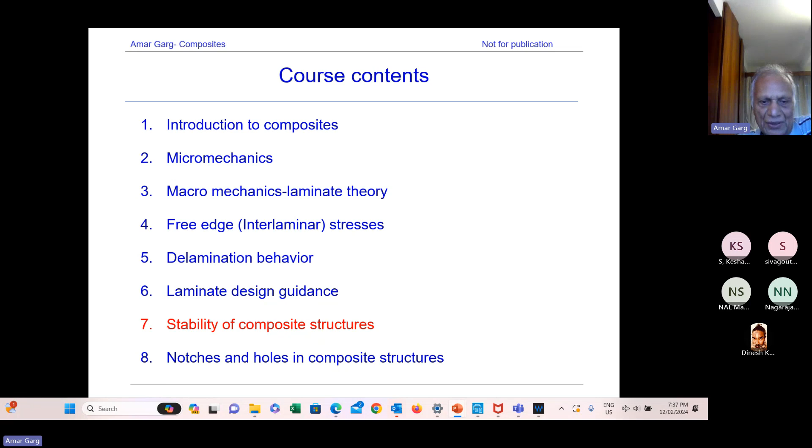Only the red-lettered topics I have not covered. So I covered introduction, micromechanics, macromechanics, free edge stresses, delamination behavior, laminate design guidance, and stability. As I said, I haven't covered notches and holes, even though I was thinking I had prepared the notes - but later on, if there is interest, I might, depending upon my condition also. Bolted joints, adhesive bonded joints, history of aircraft failures and design criteria, damage tolerance diagram, damage tolerance analysis and design of structures, fatigue of composite structures, and testing and evaluation as a separate topic I haven't covered.

But quite a bit of the testing and evaluation part I have included in the certification document.

I thought it might be unnecessarily redundant to cover testing and evaluation separately, since those notes contain a large amount of commonality with certification. So these were the topics I had intended to do, and except for stability criteria, which I haven't covered separately, but let's see, I can provide my lecture notes on stability if I don't cover it. Anyway, it depends on the interest.

Let me go to today's topic. We'll be starting with certification philosophy of composite structures. Most of the presentation is based on the 787 program with which I was associated within Boeing. Many of the slides presented are from the 787 program, which is in a public document, public domain.

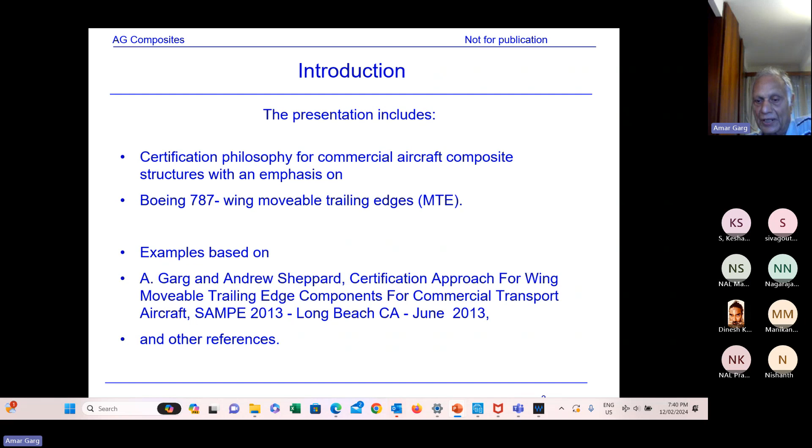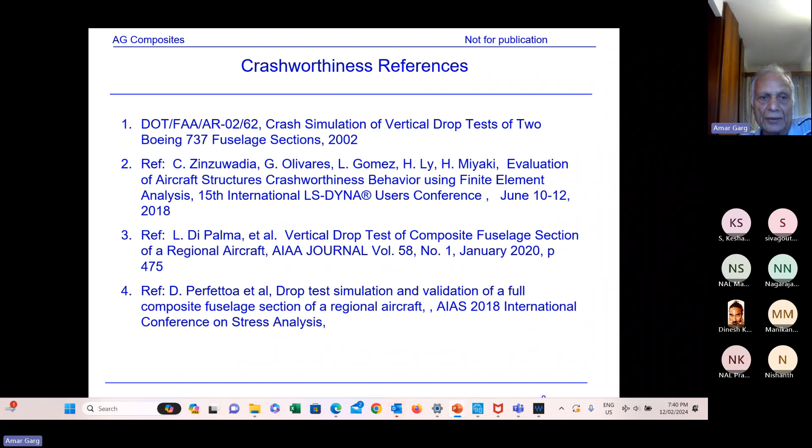I've listed various references in this presentation. It may not be all the references I might have used, but the majority of references I've used for presentations are included, along with some regulation references.

Significant amount of material included in this presentation might be repetitive, which I have covered earlier in my lectures, so please bear with me. If you find repetition, I would not elaborate on those repetitive slides, but I would briefly touch them. It's just to refresh the knowledge and also to maintain continuity of this lecture.

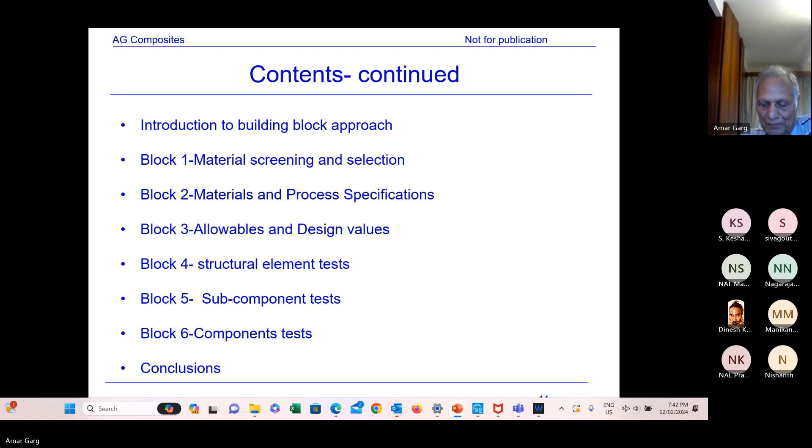Now what is certification? Certification has to be done for any product you design, whether it's furniture, according to certain standards - automobile, aircraft, anything, medicines - everything has to be certified by certain regulatory agencies if you want to sell the product. Same thing happens with aircraft.

Certification of an aircraft is a conformation to its approved design - the design which you or the company designed is approved according to the specifications provided by the manufacturer. It's confirmation of manufacturing processes and is in a condition for safe operation. When designing and selling the aircraft, you have to get certification regarding the design, manufacturing processes, and the operation. We'll see the details of this in the following slides.

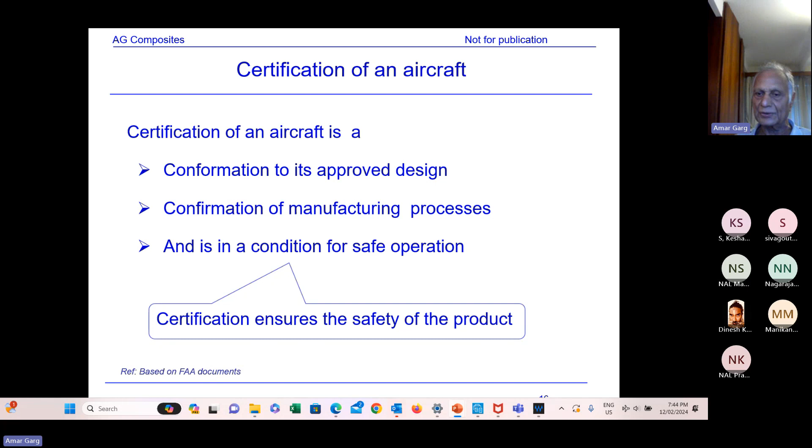That means certification ensures the safety of the product. The basic objective of a regulatory agency is to ensure the safety of the product so that it does not affect the safety of passengers and other property. Certification has three major elements: one is the design, another is the production, and the third is the airworthiness. Approvals for all three have to be given before the manufacturer can deliver the aircraft to the customer.

So what does design approval mean? Design is approved, and when the design is approved, the regulatory agency issues a type certificate. What does type certificate mean? The approval is given for a particular type of aircraft, and the company has to adhere to all the specifications designed for that type. You cannot make even a minor modification without getting another approval from the certification agency. We'll discuss the details of this in the next slide.

Production approval: production is in accordance with the approved design and quality system, and then the regulatory agency issues a production certificate, a product manufacturing approval. When the production certificate is issued, the regulator or their representatives will visit the factory, the manufacturing organization, look into all the facilities, approve the facility, and those facilities have to be maintained according to the regulatory agency. Then there is an airworthiness approval, meaning it conforms to approved design and is safe to operate.

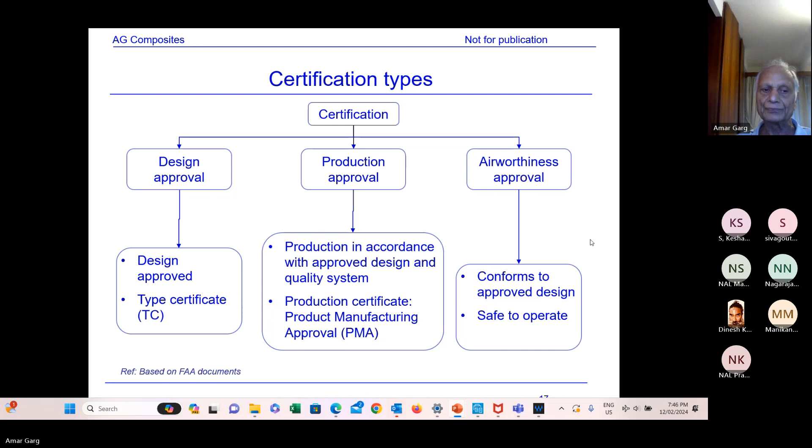Okay, what is this type certificate? Let me elaborate on this important terminology. A TC is issued by the regulatory agency to reflect that the type design is in compliance with the airworthiness requirement - the particular type design, the specifications, and all the design details are in compliance wherever required, covering the airworthiness of the approved design type or type of an aircraft to be manufactured.

You cannot change any specifications, any design detail, any manufacturing process once it has been approved. Once a TC is issued, the design cannot be changed unless at least part of the process for certification is repeated to cover the change.

So suppose Boeing 787, a model was produced, say -8, -9 or -10. Each one was certified when changes occurred. But suppose a particular model was designed with a titanium fitting material, which is expensive, and further research or design changes show that you can use aluminum instead. If you want to change the titanium to an aluminum fitting, you have to get approval from regulations again. If there are major changes, you might have to test a part of the component in order to show validity.

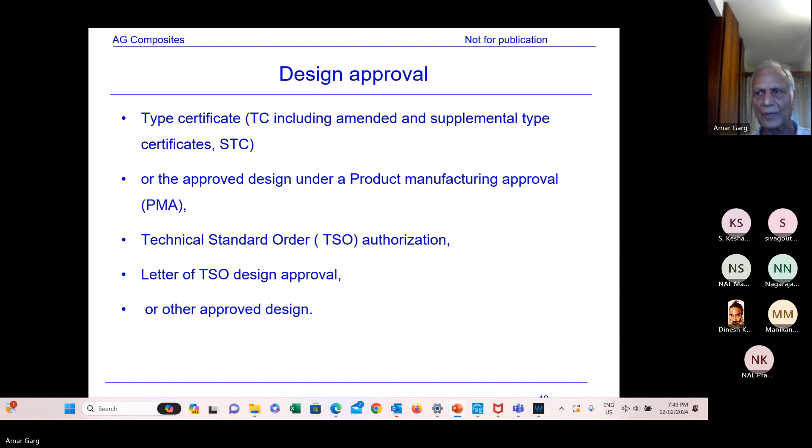Type certificate includes amended and supplemental type certificates. A supplemental type certificate is issued when there are some changes, and the regulatory agency may issue a supplemental type certificate or approved design under product manufacturing approval - that is a design approval given as a technical standard order authorization, letter of TSO design approval, or other approval. These are documents given to approve the design by the regulatory agency.

Production approval is a document issued by the FAA that allows the production of a product or article in accordance with the approved design and approved quality system, and can take the form of a production certificate, a product manufacturing approval, or a technical standard order authorization.

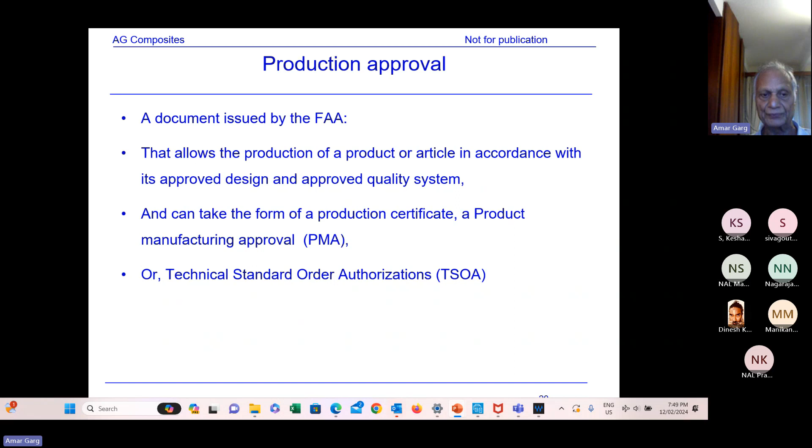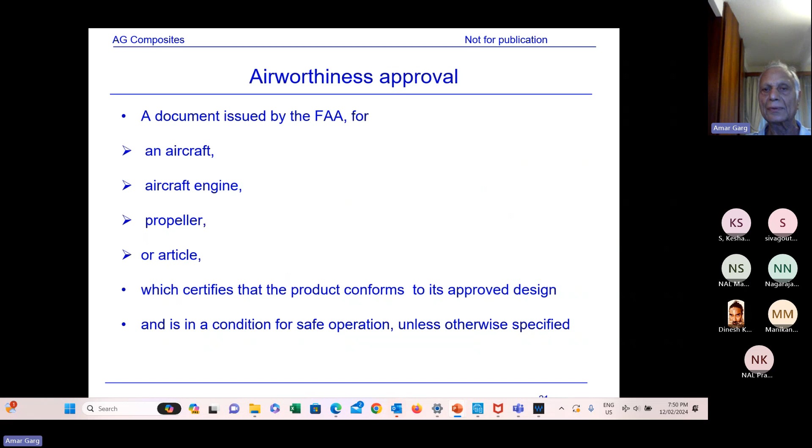Airworthiness approval is a document issued by the FAA for an aircraft, engine, propeller, or article, which certifies that the product conforms to its approved design and is in a condition of safe operation, unless otherwise specified. Once the airworthiness approval is issued, the customer or airline is able to operate it. So these are the three major elements for certification.

Type inspection authorization, TIA, is another terminology you will see in my next diagram. A TIA is issued which authorizes the official conformity, airworthiness inspections, and flight tests necessary. Once the design has been approved, the regulator issues a type inspection authorization to the manufacturer, which authorizes them to start flight testing. You cannot do flight testing until you receive a type inspection authorization.

Okay, what does it mean? It fulfills certain requirements - type certificate, supplemental type certificate, amended TC, and amended STC. This is the objective for issuing TIA.

Now here is a flow diagram which I have taken from the Composites book by M. C. Niu, with a few changes I have made appropriately. This shows the complete certification process for the aircraft: the manufacturer submits an application for type certificate, an airplane specification report, and a certification plan to the regulator, and after receiving and studying that information, the regulator assigns the project number.

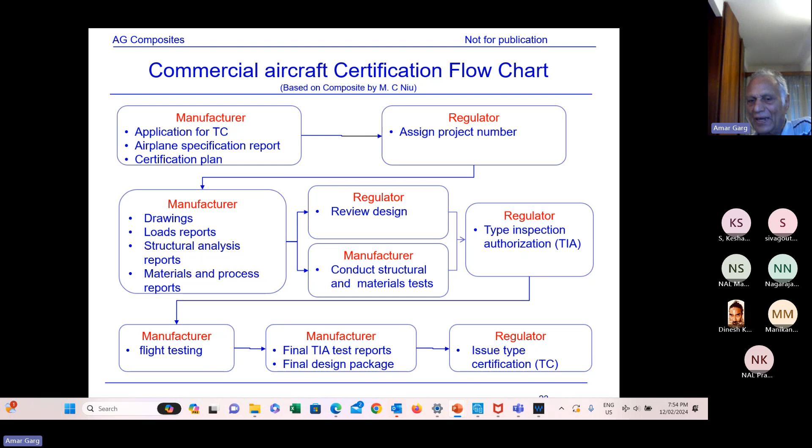Similarly, for military aircraft certification, I do not have any flow diagram because that may very much depend upon the type of aircraft, military agency, and the process between manufacturer and regulator would be negotiated. So this standard flow diagram cannot be given. A flow chart for military aircraft will be different to civil aviation and is not provided here.

Certification, what are the main elements here? One is manufacturer, naturally. There are two stakeholders, manufacturer and regulator. Next is design analysis, testing and evaluation, manufacturing - these are the major elements. Then you have documentation, which is submitted to regulator, and product certification. Just very briefly, I have prepared this flow diagram for this.

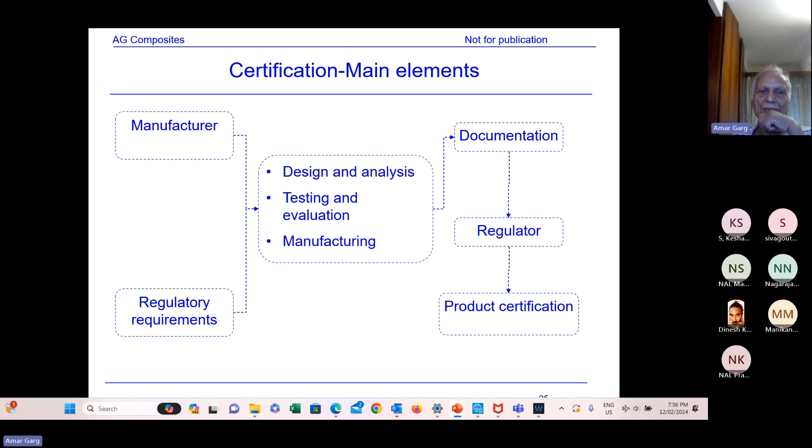Are there any questions so far? Hello? Any questions from audience? No? No, what happened? You can either unmute and ask, or post your questions on Q&A. I don't see any questions in Q&A right now. Yeah, okay. I thought, just asking orally the question, I would welcome, but seems no question. Let me continue.

Now, certification of composite structures. Earlier aircraft, in the 60s and 70s, were mainly metallic aircraft, and all the regulations at that time were written for metals. Of course, when composites came into picture, some of the requirements changed, and I'll talk about that later. So regulatory requirements for certification of composite structures.

According to the regulatory agency, as far as the requirements for composite structures are concerned, it is the same reliability and safety required for composites as for metallic structures. So there's no difference in the requirement whether it's metallic or composite, because the regulator is looking for safety and reliability. They need to ensure the same amount of reliability and safety, whether it's metallic or composite.

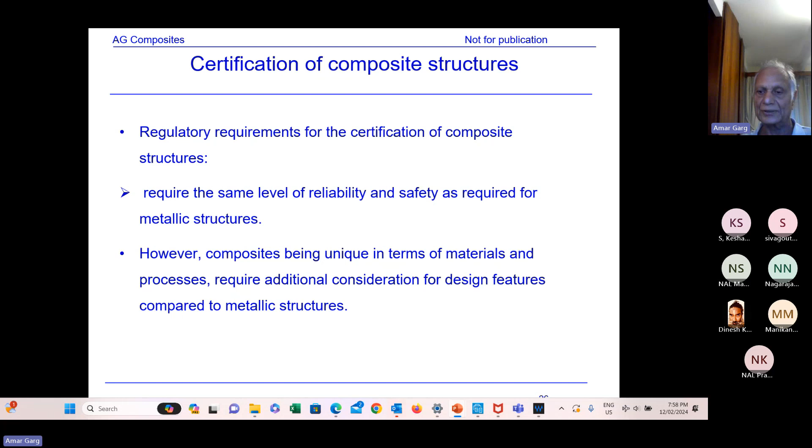However, composites being unique in terms of materials and process require additional considerations for design features compared to metallic materials, because there are many issues with composite materials which are different to metallic materials. Some of those differences I had covered during my introduction lecture, but I have included a few slides from that lecture also, just to illustrate again certain key factors for composite materials.

So unique features of composite structures. One of the basic things for composite structures is it's not isotropic material. Metals are macroscopically isotropic materials. Composites are heterogeneous nature materials which are anisotropic, because anisotropic means they have directional property, whereas metals we always treat as isotropic, that is, in each direction the properties are same.

Although even for metal, in the longitudinal direction, transverse direction, and LT, slightly, because of grain differences, there's a difference in properties like strength, but not much. We don't differentiate, only at the time of margin analysis would we consider the minimum strength in a particular direction, and when designing a lug and many structures, you have to care for whether you want that particular direction as L, LT, or T. But we don't treat that as anisotropic material because the stiffness is same in all directions.

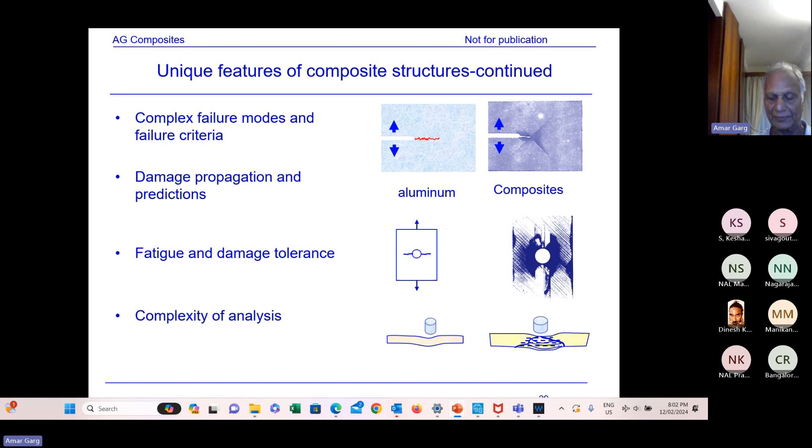Other features are material allowables and lack of data. A large number of tests are required in order to generate the reliability and design information to validate composite materials. Whereas for metals, like aluminum, there's tons of data available in handbooks, like Mil Handbook 5, containing material data for various aluminum types, steel types, titanium.

So there's standard data available. Whereas for composites, it's very hard to find standard data because no company would ever publish it in the public domain. They keep it as proprietary data.

Processing of composite materials is quite different to metallic materials, and there are many different types of processes one will use. Materials and fabrication process variations, lightning strike damage protection - this is another issue with composites, because they are inherently low conductive materials, which creates more damage compared to metals when a lightning strike occurs. So lightning strike protection has to occur. The type of damage on a metallic aircraft would be different to composites, so that is another area you need to consider.

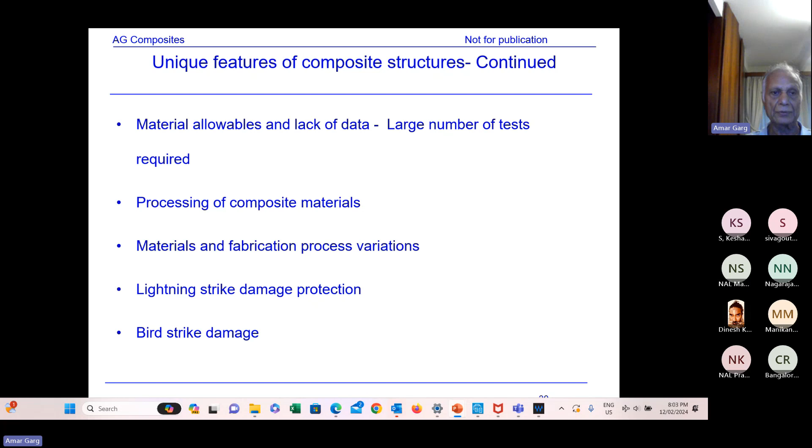Galvanic corrosion - I talked earlier about what happens with aluminum, where there's some electrolyte, mainly water or moisture, between aluminum and carbon, and an electronic current flows, which causes leaching of the aluminum, that is corrosion of aluminum. So in order to protect the aluminum from corrosion, when aluminum sits over a carbon skin, it's naturally likely to corrode. So what happens is, to prevent that corrosion, some kind of barrier ply is introduced between carbon and aluminum.

So a glass fiber ply normally acts as a barrier. Then fire safety - there are certain fire safety issues for composite materials compared to aluminum, and structural repairability is another concern. These are some of the factors which need to be considered while looking at the differences between aluminum components and composite components.

So surely, from an analysis point of view, the analysis of composites becomes more expensive compared to aluminum. But nevertheless, in spite of all these differences, complications, and issues with composite structures, at the end of the day composite structures still seem to be more efficient than aluminum. And that is why there has been a significant increase in the usage of composites in the aircraft industry.

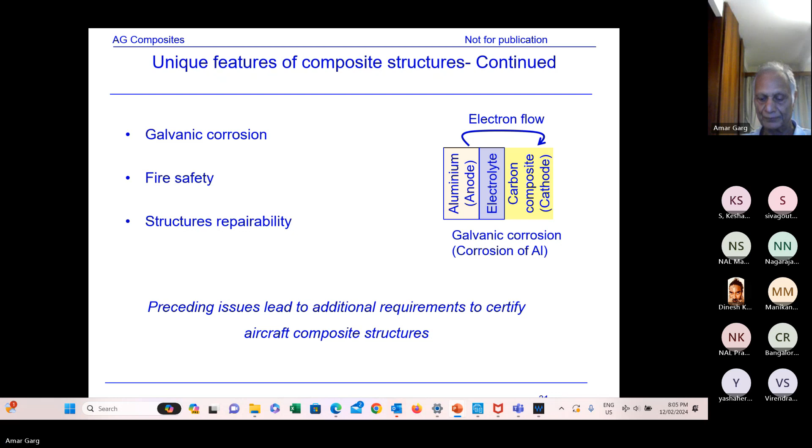And another thing associated with this is for composites, because these regulations are general regulations which mainly cover metal - it doesn't say it's only for metal, but the requirements are written in terms of metals basically. So what happened when composites were introduced, due to certain differences between the behavior of composites and metals, the FAA developed a modification, another document, an amendment, called Advisory Circular 20.107. The first edition was A.

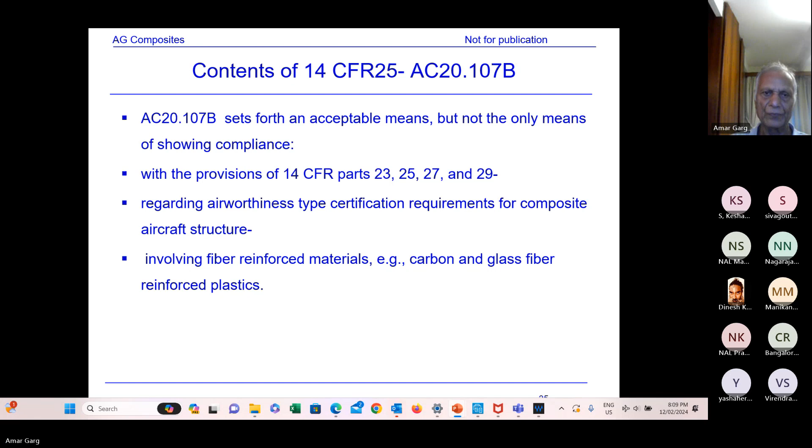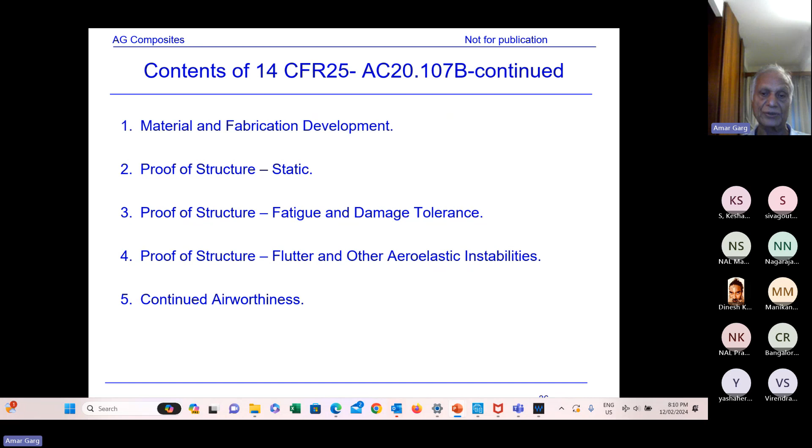So it contains certain sections which I have listed over here, and all these FAA documents you can download from the FAA free of cost. These cover materials and fabrication development, proof of structure static, proof of structure fatigue and damage tolerance for composites - how do you meet those requirements - proof of structure flutter and other aeroelastic instabilities, continued airworthiness, and additional considerations like crashworthiness, fire protection, flammability and thermal issues, and lightning protection.

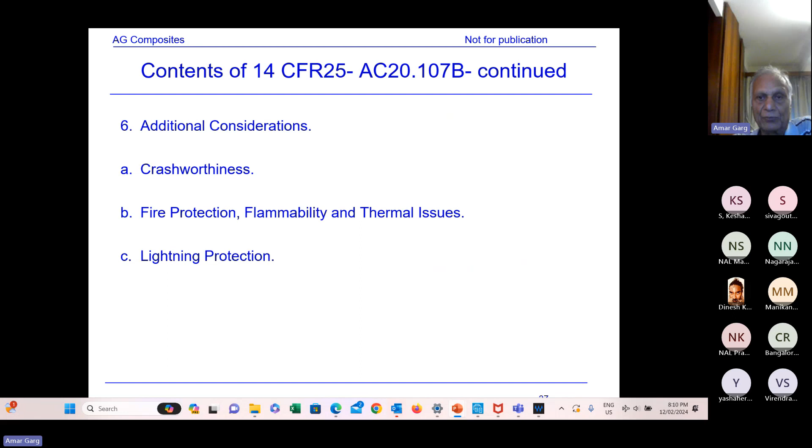Design certification approaches. Any questions so far? It has been very quiet. I would like to hear from the team. Anyone? Volunteer?

Is it interesting? Is it useful material for you? Some of you from NAL?

Yes, Professor, please go ahead. I just want to know... carry on.

It looks fine, Professor, but still we have to learn actually. After your lecture, maybe we have to go through that again. We can have some doubts, then we can post them to you through either email or the next classes.

Sure, okay, so it is quite interesting. Yes, it is very useful for our kind of organization, NAL. Okay, that's good, Professor.

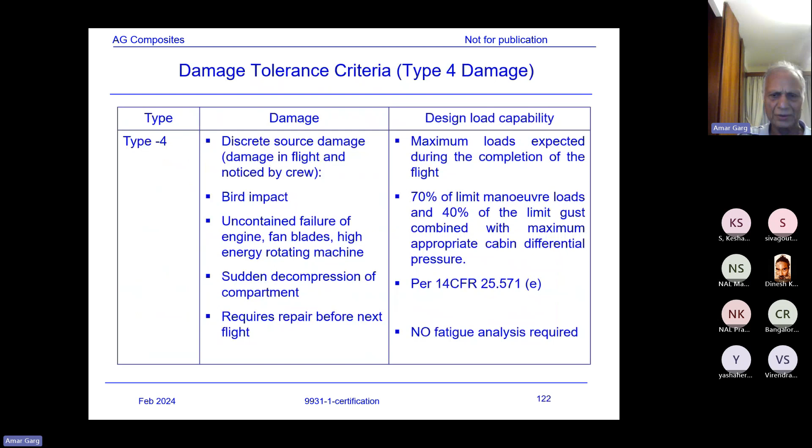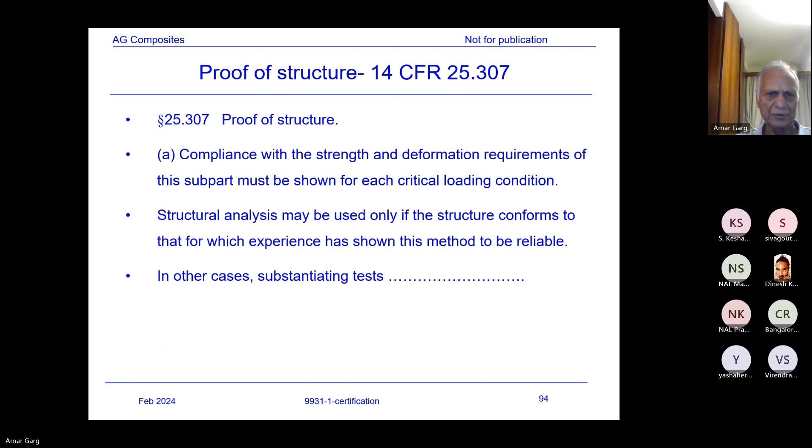Strength compliance with the strength and deformation requirement must be shown with... let me see if I quoted that here. Maybe I have not quoted it. It is either 305 or 307, saying the testing proof of structure. I'll come back to that exact reference, but it says ultimate load carrying capability for 3 seconds only, that is what the requirement is. But I'll give you the exact definition. I thought I had included it somewhere, but it doesn't seem to be here, I might have deleted it.

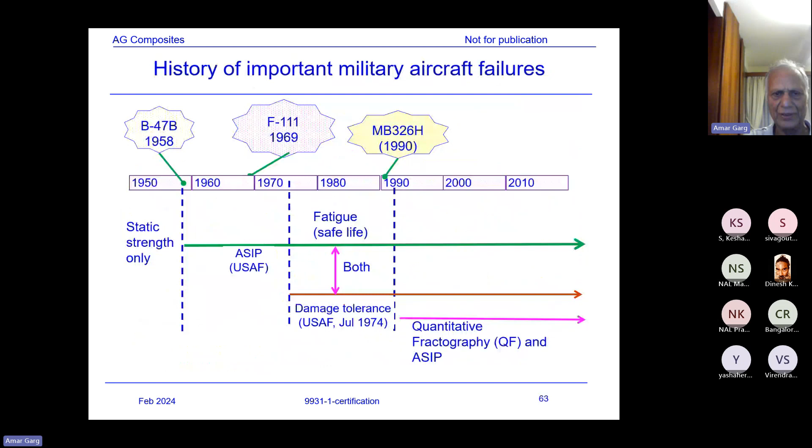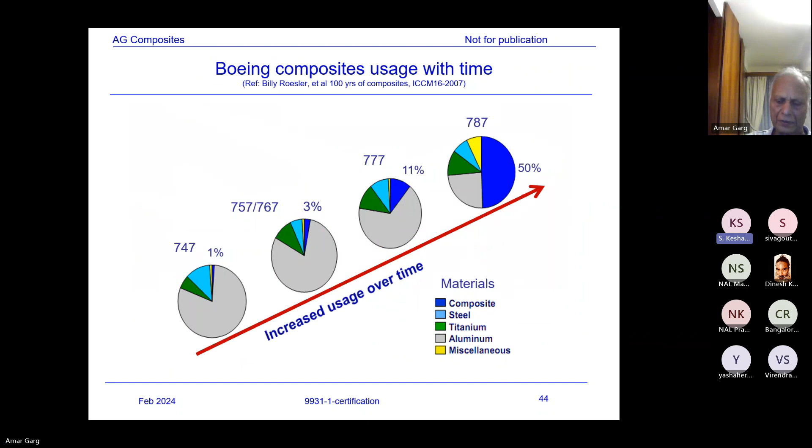Okay, interesting. Any other question? Okay yeah, I have one, Professor. Yeah please. Thank you, Professor.

The testing is only done for the nominal design approach. Is it like, if we have some deviations with resin pockets or wrinkles or some other deviations, apart from the nominal design, do we consider some robust design coupon tests and the variations in the layup and then test them? Then are there any allowables for that?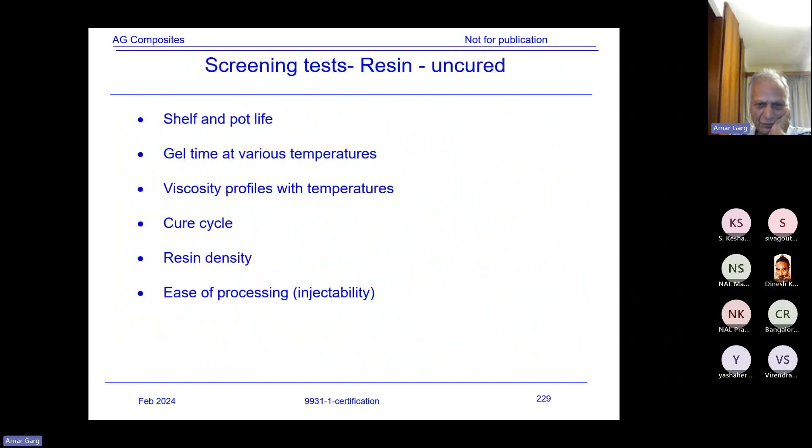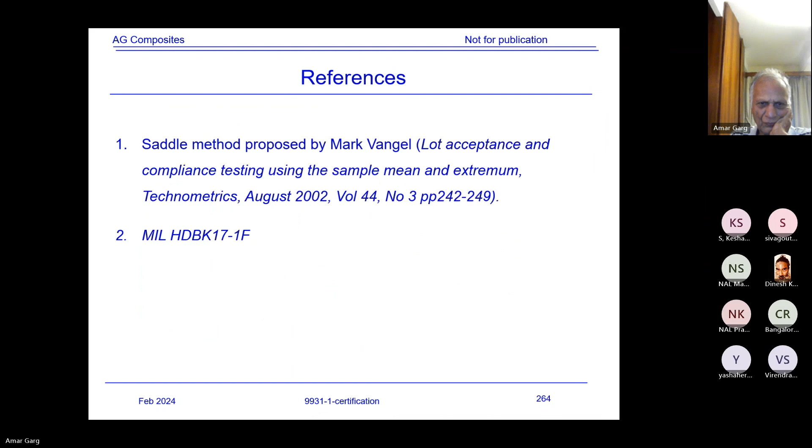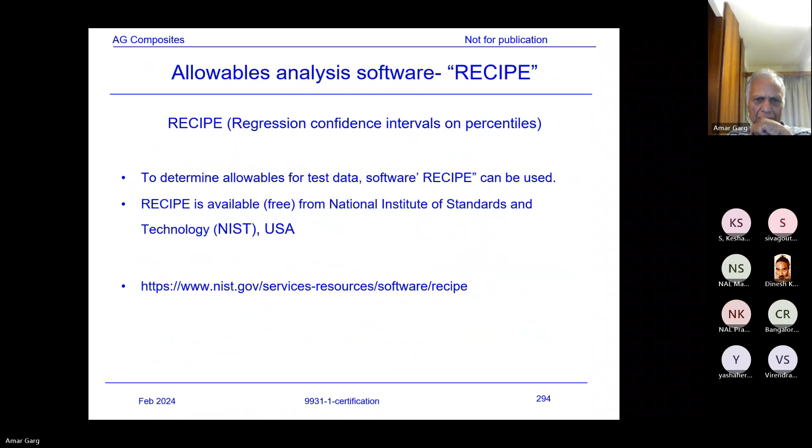Okay, let me show you one slide here, just preempting that. Okay, what is it? Allowables and design values, and then I think I have listed just an example subcode. Oh, I was looking for this one.

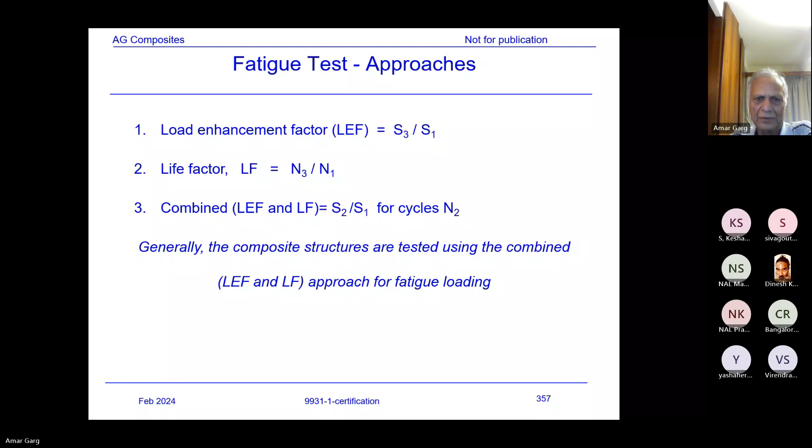Strength and deformation: the structure must be able to support ultimate loads without failure for 3 seconds. That is the compliance approach, this is about 305. Now as far as your other question, let me see where did I include it. I thought I have it here.

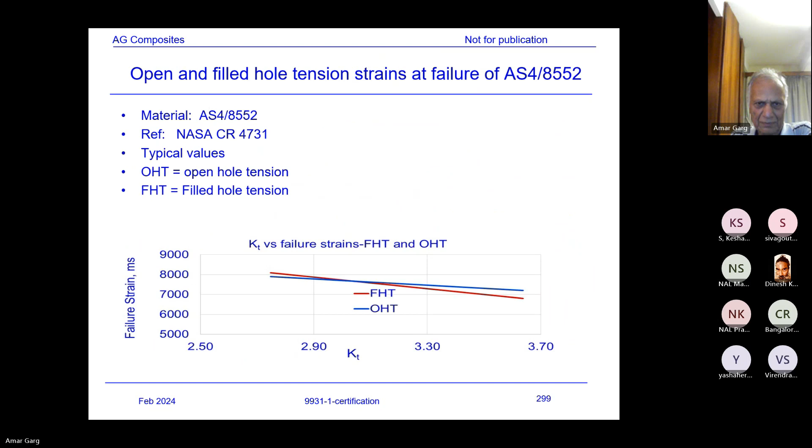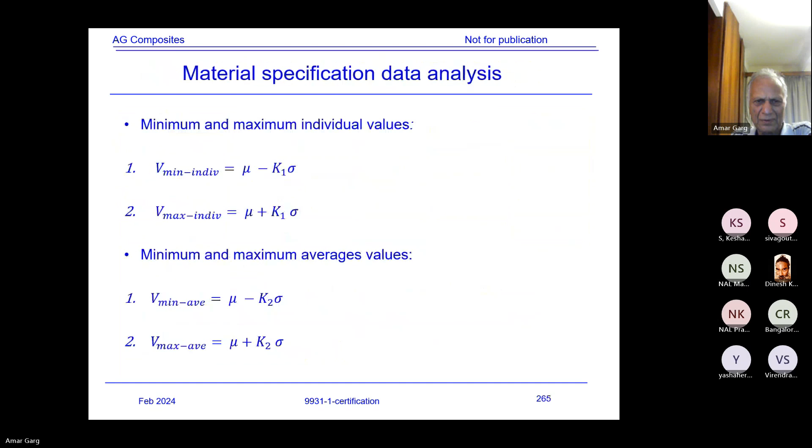Production anomalies, test matrix... or did I delete it? I'll look into it, I thought I really had that deviation section covered. Various production anomalies, material batches, diffusion... maybe something is missing here, I might have deleted the slides. Test examples, I had... it seems some slides are missing here, but anyway I'll put them back.

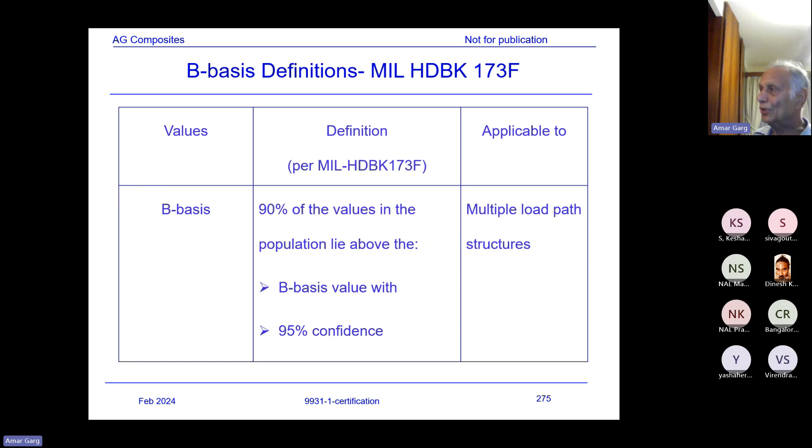You're having... I have got several slides where I've shown that all these deviations, like wrinkles and other production anomalies, we test the coupons and determine the knockdown factors for those issues. So I thought I had it here, but maybe not.

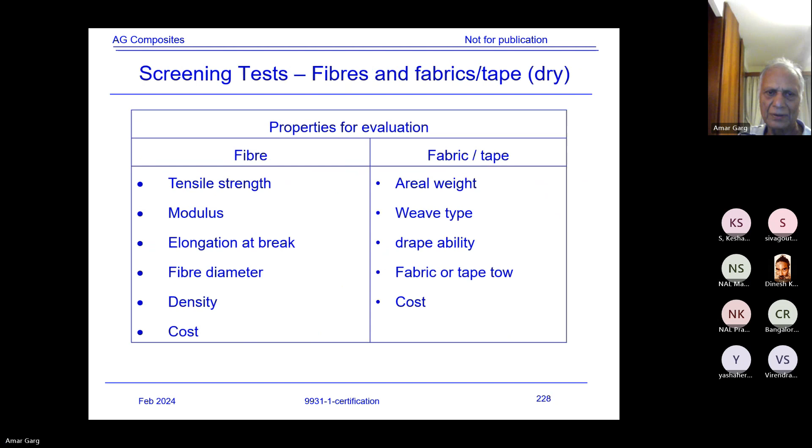I think it's okay, oh Professor, yes, oh sorry, production anomalies. Yeah, I was looking into some other way. So like wrinkles, surface depression, this is what we wanted to know. Yes, you have to determine the knockdown factors for each of these.

Now what happens with these ones? They are not part of a normal production process. When you are producing a component, you expect it to be defect-free, but there will always be some defects because nothing is defect-free. Some defects may be there, which you develop during your reliability program as acceptance criteria, that yes, I'll be accepting that much defect without changes or repair. And that is why it is essential to study all those defects that can happen in production and determine if there is any loss of strength, stiffness, or fatigue behavior due to those defects, and what is my allowable, how much damage I can allow, and what kind of repair is needed.

We had done a lot of work on this, and I was heavily involved in it. In order to validate, a lot of queries used to come to me: how do I verify this one, can you suggest the allowable or what is the limit? So, some of those various other issues I have not included in this one.

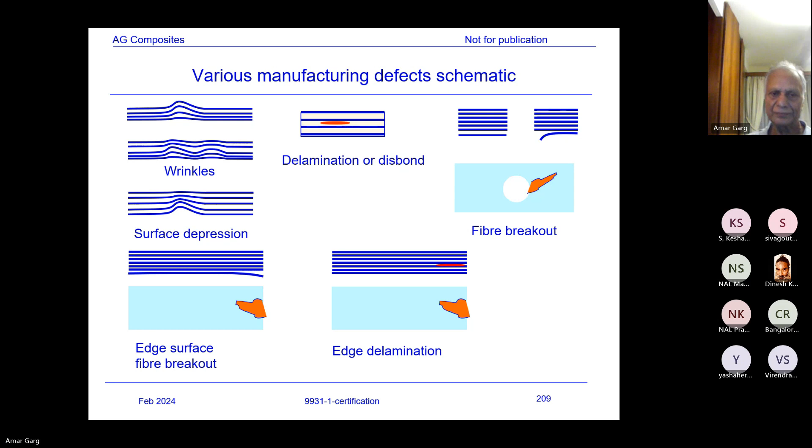Was this your question? Yeah, that was my question. But I'll talk about that. So in fact, that's what I was wondering.

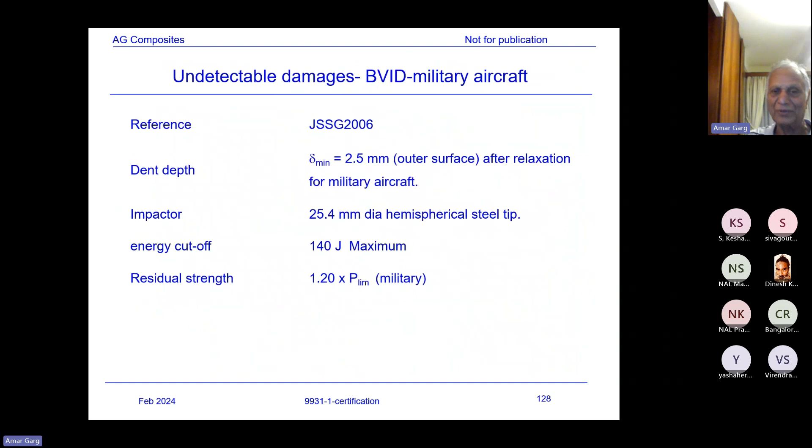I have included most of the factors which go into the design and certification over here in brief, but I just forgot the sequence. Even though I've seen such a document hundreds of times, I forget where is what.

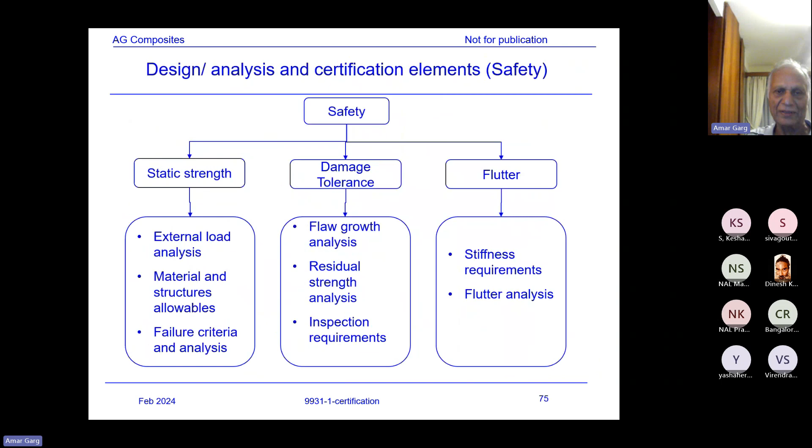Okay, now let me go back to where we left off. Yeah, we're here. Okay.

Design certification approaches. I've talked about this in brief earlier, but just to clarify, I'll repeat it because it's very important again. What are the various philosophies by which you could certify the design?

There are three types of certification processes. One is certification by test, which is known as a point design approach. The other is certification by analysis. And the third is certification by analysis, verified by test.

In the first approach, when the company doesn't have significant amount of money and there's only one type of product, and they are never thinking of changing the product or doing different versions, they might live with testing as a point design approach and design certify by testing.

What it means is you have a limited amount of data. Suppose you are designing a flap and you know you're not going to change the material or any details later on. So you don't have the material allowables, you don't have money to develop a significant amount of material allowables. So you'll pick up some standard material allowable approximately from literature, make some guesses, put some knockdown factors, design the component, and test it.

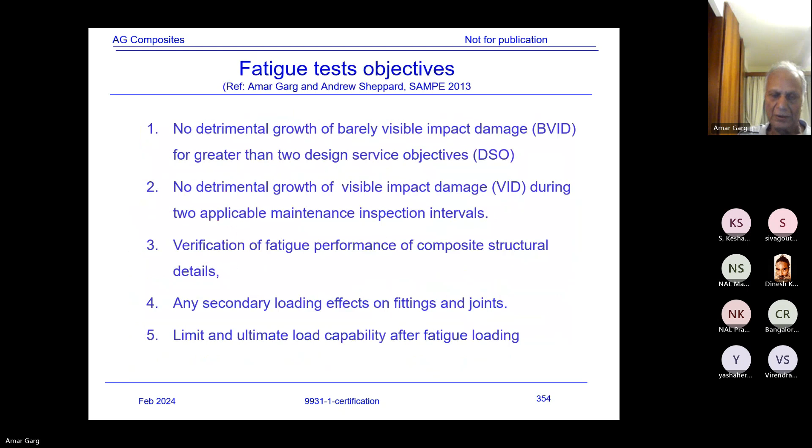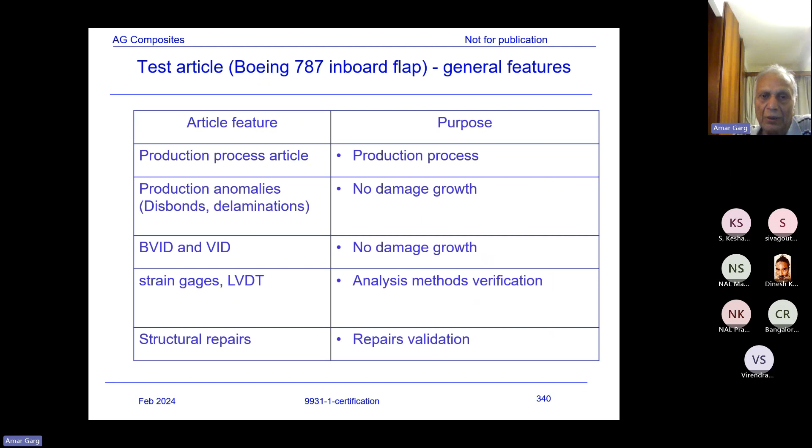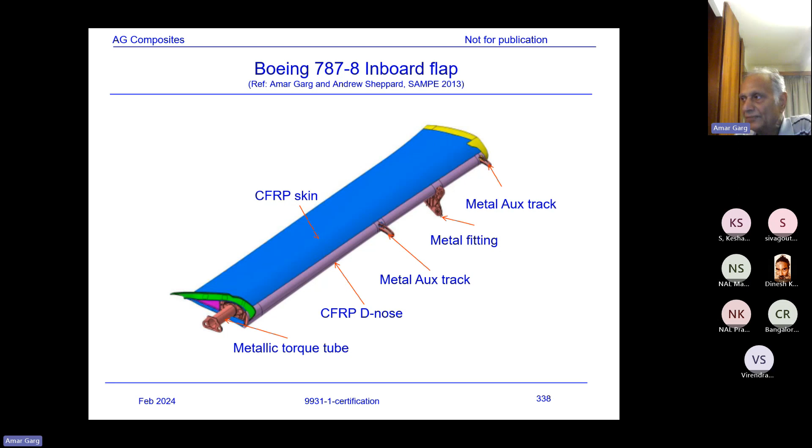So when we were testing the flap, we had the strain gauges. And by the way, before you test, you have to submit the plan to FAA, the regulatory agency. They have to approve, and you have to show, suppose this is a flap, the strain gauge locations, the design, everything—that is the method, and then the compliance method to the regulator, and then you test it. I'll talk about the testing.

Now, it seems to be too good to be true. You are dealing with such a large structure, and your FEM has predicted a particular strain. You are trying to show, by testing the component using the strain gauge, that the strain which you are getting from the test is very close to your prediction. And by the way, the requirement was within plus minus 5%. And that is how you validate that the method you are using, the finite element method, is able to predict the behavior.

Now we're talking about this issue because this is a very important aspect, in fact. How do you validate? How do you verify? How do you show the compliance to the certification agency? I've tried to cover as much as possible, which is required from my experience on the 787 program.

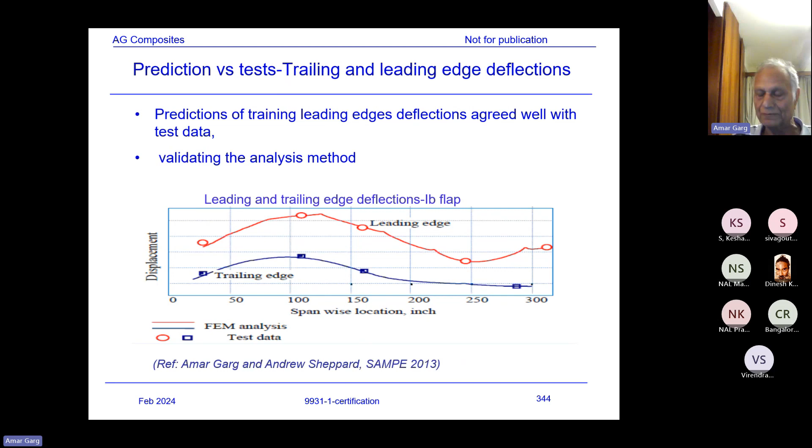Okay, so this is what happens: the regulator is continuously involved in the whole of the process to meet the compliance. Otherwise, they are not going to certify. They have to sign on all the documents to see the verification and validation of the design, all the allowables. They had to witness, through their representative, all the allowables testing—coupons, elements, components.

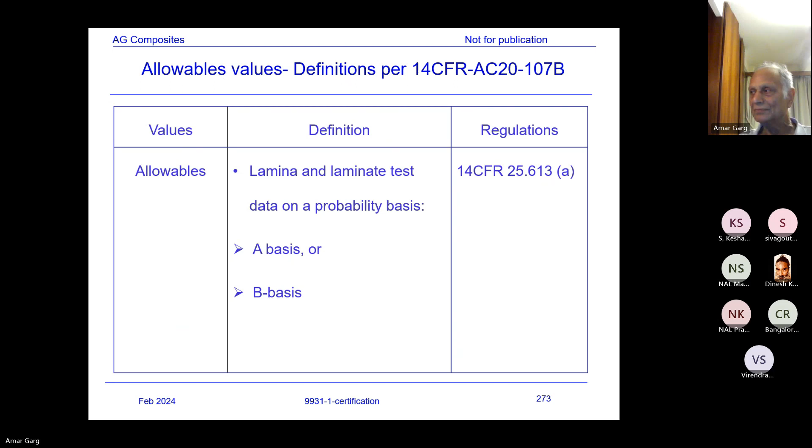Nothing goes without the regulatory eye. They witness, they know everything that is going on. You cannot just work in isolation and then submit finally the data to the regulator. No, it doesn't happen. They are continuously involved throughout the process. I'll talk in detail about this—it's an important aspect.

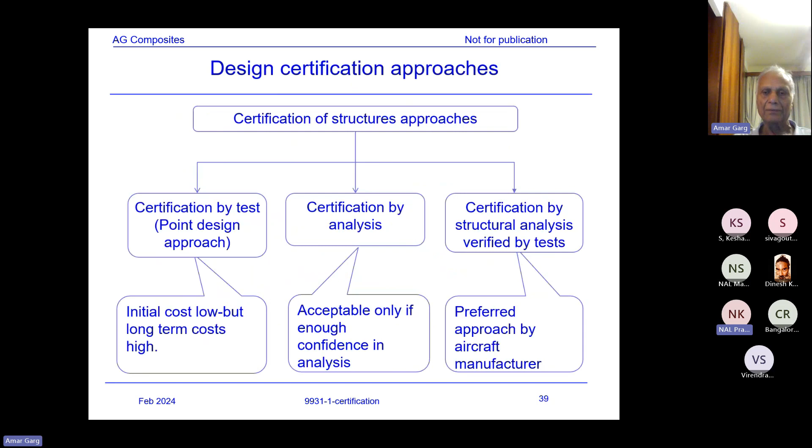Did it answer your question? Yes, Professor. But you had shown the strain correlation between test and analysis results for different percentages of ultimate loads, right? Well, yes, various percentages.

You are showing the compliance at every load condition, and if there is buckling, then they would be deviating, in fact. And that was the most difficult during our certification testing—buckling is most difficult to predict. But the regulator doesn't care about it, because you are trying to design the structure based on your analysis, like nonlinear analysis using Nastran and Abaqus.

And if you can't show the compliance, your testing strains are not matching with the prediction, they are not accepting the design. We had spent a lot of time correlating the data. It was not as simple as it looks.

First time, let me assure you, you make a nonlinear model, run it and test it, you may find surprises. There may be buckling, nonlinear buckling, maybe different results. And then you are looking into type of elements, looking into various constraints, whether I have done right or wrong, and that is what will adjust your buckling behavior.

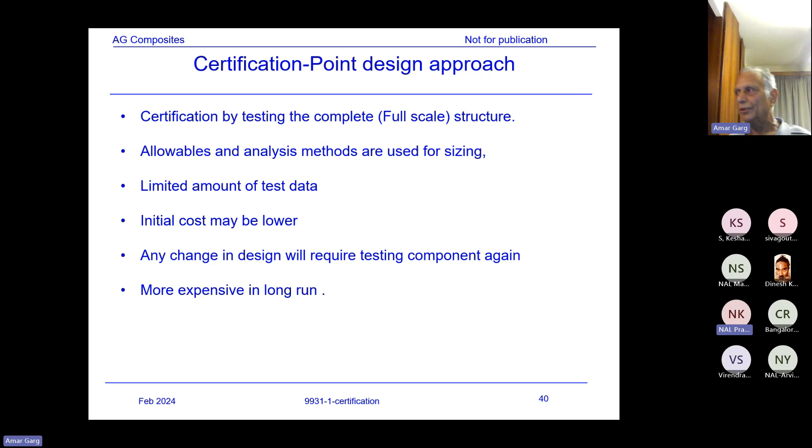Okay, any more question on that? Hello? All right, okay, but I'll discuss more in detail later on. Yes, yes, okay.

Okay, certification analysis verified by test. As I said, essentially the design is done through analysis. However, that analysis is verified by test. So certification analysis is verified by test - that's analysis, certification of structures. That's what it is. However, this is very important.

Testing coupon, element, subcomponent, component, which provides the allowables and analysis method verification, which feeds into this one. And that is how certification is done, which is a building block approach. We'll talk about the building block approach.

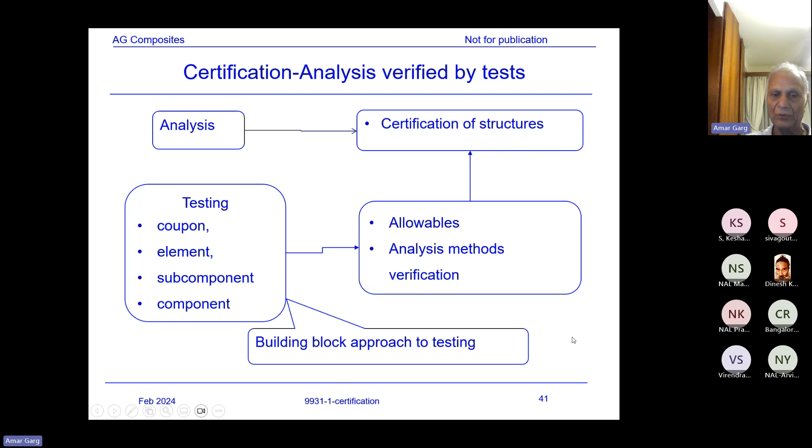Earlier, in the 1950s, the design used to be essentially based on the ultimate load and fatigue safe life design approach. However, with this approach, the Comet aircraft, the first jet commercial transport aircraft - three Comets failed around the early 1950s, and that virtually finished the Comet industry.

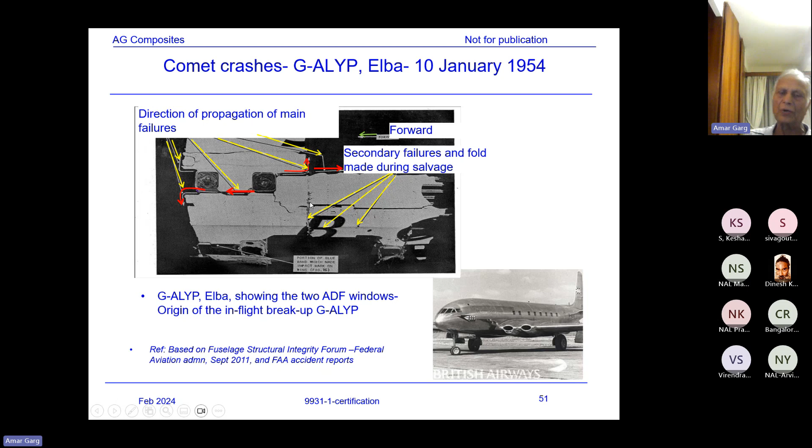Now, another reason was how this design was certified. Quickly, I'll discuss - basically this is supposed to be a good design for windows, that's what you find all modern windows to be elliptical. And this was the Comet, which caused a failure - a poor design.

However, what happened? I've just added this slide, which was not there in earlier aircraft failure investigations when I discussed. What happened with this Comet aircraft, how it was certified? They tested the fuselage in fatigue. But what happened when the testing was done?

The design pressure was 8.25, for which the internal pressure of the fuselage was designed. And they tested at 16.5 psi per cycle load - that is, they doubled the pressure for the fatigue loading, thinking that if they double the pressure, they would only have to test a few cycles, and then it would be okay for certification. Comets were certified based on that criteria.

But what happened when they tested later on? This slide I'll show before I go back to the previous one. So what they did after the failure investigations - when they were doing the failure investigation, they tested the fuselage again, and they tested for the design pressure fatigue cycle. To their surprise, they found the fatigue cycles - only 3057 cycles - 3000 cycles and the fuselage failed.

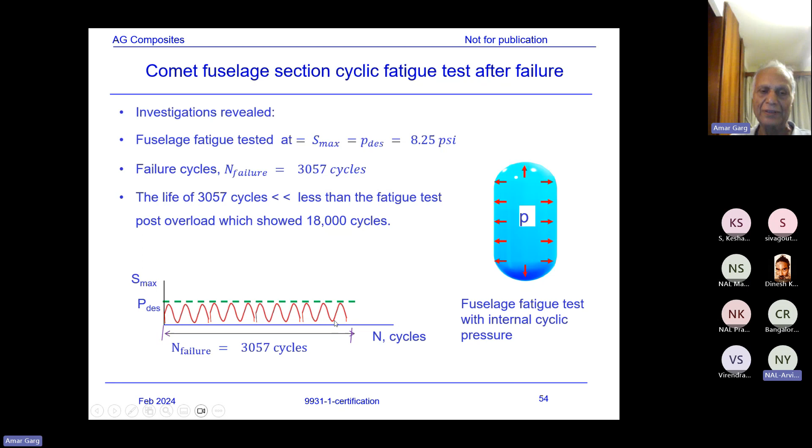Anybody has any answer? So when the fuselage was tested for double the pressure for 30 cycles and then tested at normal design pressure, it lasted 18,000 cycles. But if it was not overloaded in the beginning, tested at design pressure only, it lasted only 3,000 cycles. Any thought before I explain?

Because of the overload, professor, and because of the crack retardation, sir. Yes, that is what happened. Because of overloading, some small load is being applied, initially more, then subsequently less. So this is retardation, then a hardening kind of thing. Yes, that's right, and that is what happened. At that time, really, it was not thought of.

Now, this is a practical thing which happened in a real structure, the overloading effect, and such a tremendous effect of overloading, retardation effect in the aluminum. So when you are doing the fatigue design of aluminum structures, compared to composites, which don't show that retardation effect or these load cycle effects normally, metals are very crucial. One cannot ignore, when doing fatigue design, the overloading or retardation or sequencing effect. So that is why testing of the metallic component becomes more difficult in fatigue than composite, which I'll be talking about later on.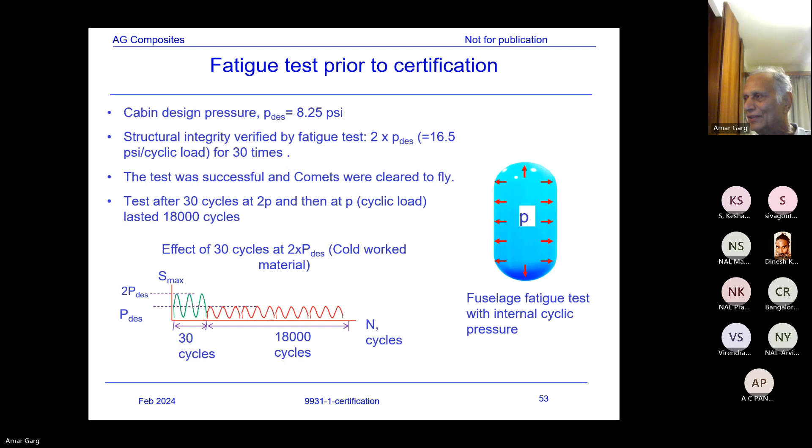Of course, this is all history, but what happens, it is just to know about the history to get to success. We always learn. So what happened later on?

And I'll discuss it in detail later. But before that, what happened after? Amendment 45, in December 1978, came into picture, issued by FAA, which mandated damage tolerance. And today, every structure has to be designed by a damage tolerance philosophy, which I talked about earlier in damage tolerance. However, certain structures like landing gear, where inspections might not be practical, are designed with a safe life philosophy. Otherwise, it's a mandatory requirement that structures be designed using a damage tolerance philosophy.

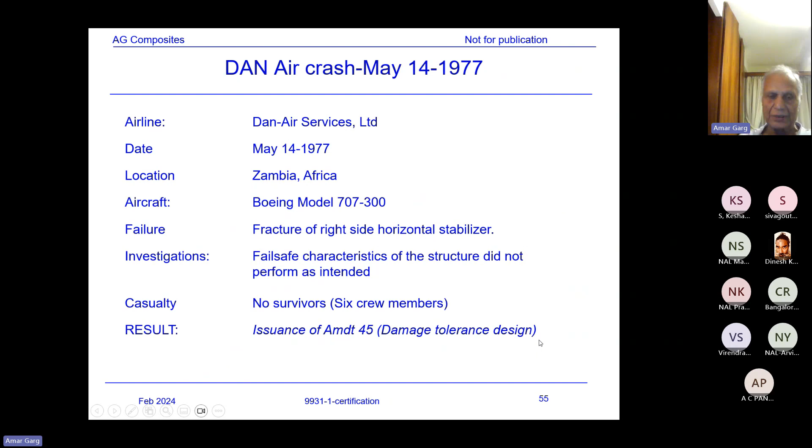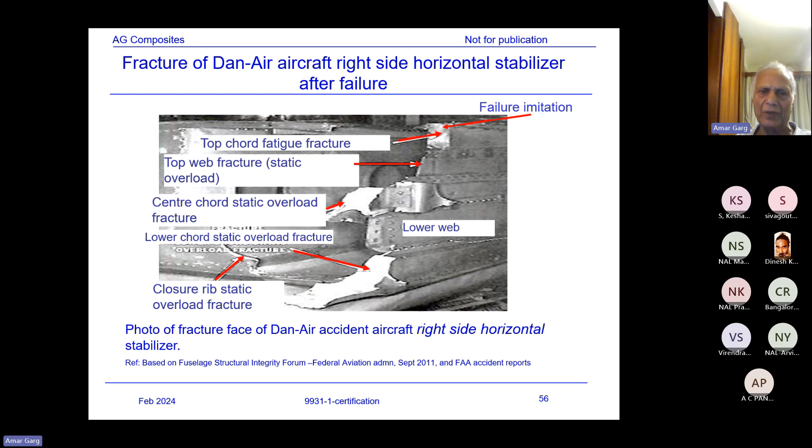Now, what happened with this one is a horizontal stabilizer spar - there's a top chord, web, middle chord, lower web, and lower chord. And it seems failure initiated from here, some cracking, and then it propagated to failure. I had included earlier in my presentation the cracking details, but have removed it because it becomes too much. You can read some failure investigation reports if you want to know more about this aircraft failure, or next time I can show my slide on how the cracking propagated, what happened later on. I've got some slides with me.

And then the Aloha Airline, where the aircraft failed due to maintenance, due to a defect - what happened? Sorry.

During maintenance, they did not detect some fatigue cracks which were propagating. The cracks kept on accumulating, kept on propagating further and further, and caused a fatigue failure. That is why later on widespread fatigue damage, WFD, came into picture, which I'll talk about later. And that is how issuance of Amendment 96 for widespread fatigue damage happened.

That dictated, and that is why it dictates, that every aircraft design has to be fatigue tested before certification. So this is rule 571B to ensure the safety and address widespread fatigue damage, and it has to specify the limit of validity of the life.

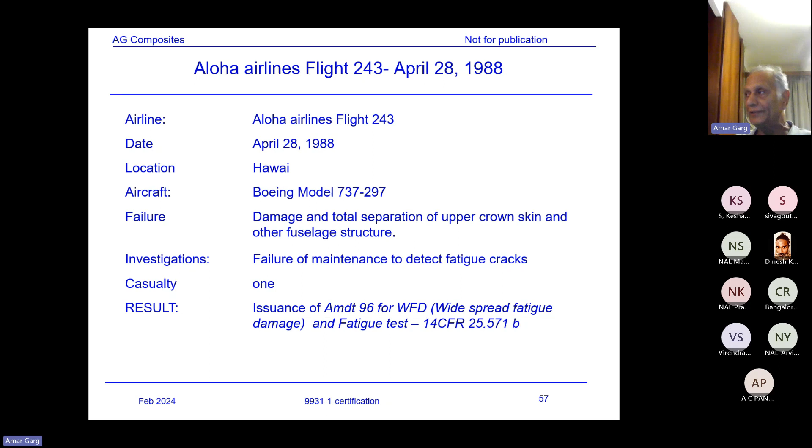So for the Aloha airplane, the primary damage was total separation and loss of the major portion of the upper crown skin and other fuselage structure. This was a failure of maintenance - during maintenance, they did not detect the fatigue cracks.

And during maintenance, the sequence of cracks which were generated were also not detected. Then gradually the fatigue cracks initiated, propagated, and caused a sudden failure. Anyway, so that was the history of that.

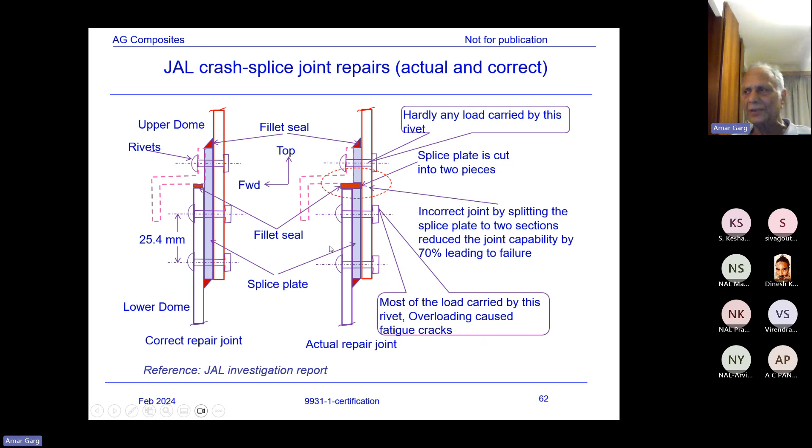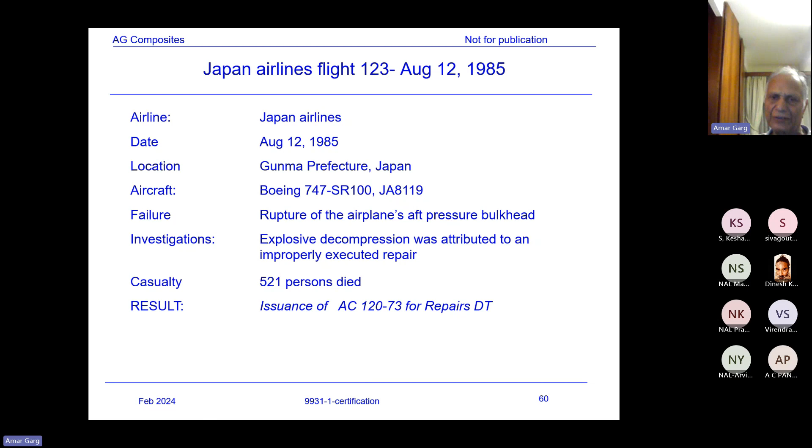You can download it from the internet, Google. If you go to the JAL aircraft accident, you will find various reports about this flight, or I'll send the report. It's interesting to read if you want to. But next time I might show the cracking picture.

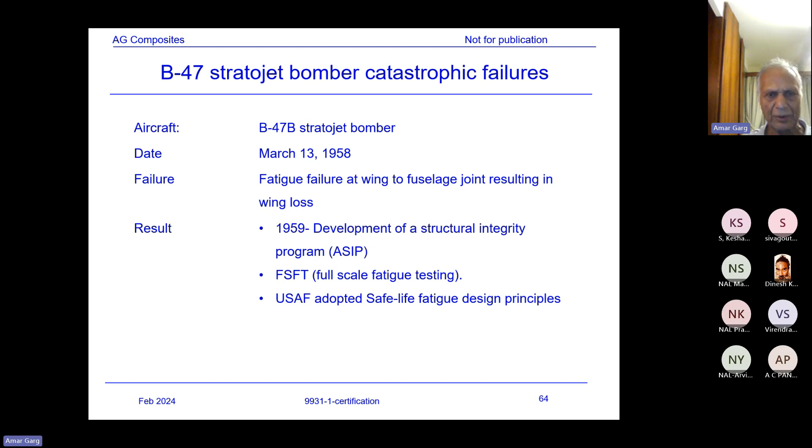Hello sir. Yes, please. I'm Arvind Yadav. Nice to see you again, sir.

I have a question - for metal versus composite, can the SN approach be used for predicting fatigue? Damage tolerance, of course, is as per the certification, it should be used for the composite structure, explicitly mentioned in the FAR 23. But if someone wants to do it based on the SN life approach, will that be okay or not?

As far as certification is concerned, certification wants a damage tolerance approach. You need to ensure that the large damage, small damage, you are complying with that in order to meet the certification requirement. For 25, I do not know 23 - what are the requirements for damage tolerance for 23? I will look into it, I have never really looked into the details. But 23, for the small utility aircraft, also tells it should be damage tolerance. Okay, so you got to meet the damage tolerance requirement.

Come on, what is happening? I was trying to show this.

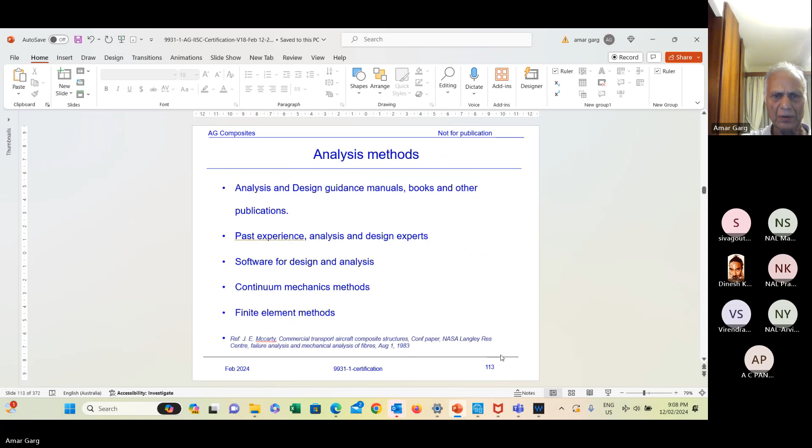If you might remember this, my damage tolerance diagram - I'm not sure whether 23 also has a similar type of requirement or not. I would admit I don't remember, but for 25 this requirement has to be met, and damage tolerance requirement has to be met using all these various phases. I'll talk about it next lecture, although I have talked earlier about damage tolerance in detail, but again, just for the continuity of this presentation.

Right, so 23 also explains it like that only? Okay, the residual strength should not go below the limit loads at any time. Before that, it should be repaired and brought back to the original ultimate load. So it's the same requirement.

Yeah, for that. Okay, so from what we used the safe life approach for the metallic - if we have sufficient data on the SN curve for composite laminates, doing the study based on the SN life approach, will it be appropriate or not? That was my question.

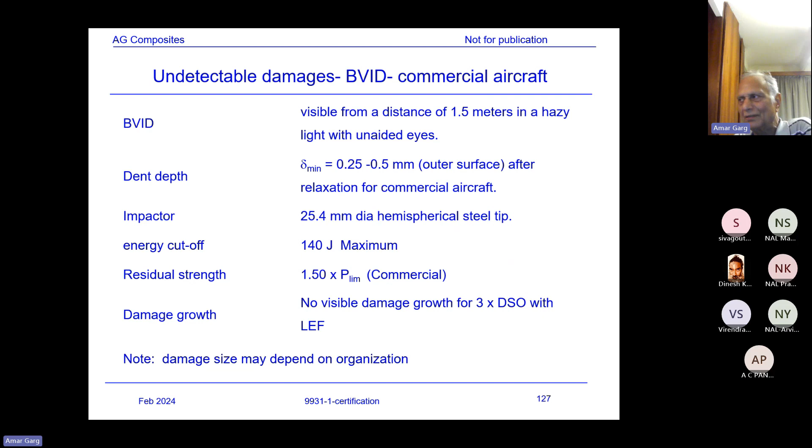Yeah, that's okay, that's what we do - in fact, safe life, that's what endurance limit approach. Correct, because in the design phase, you can't do the propagation type like you do for metal, that's not possible. I misunderstood your question, okay.

And I'll talk about that - in fact one of the slides here I have shown fatigue design endurance limit approach, that's what we would discuss. Yeah, for composites. Yes, composites, not for metals. Please put more time on that, sir.

So it's like a safe life. You are right, yeah, that point of view.